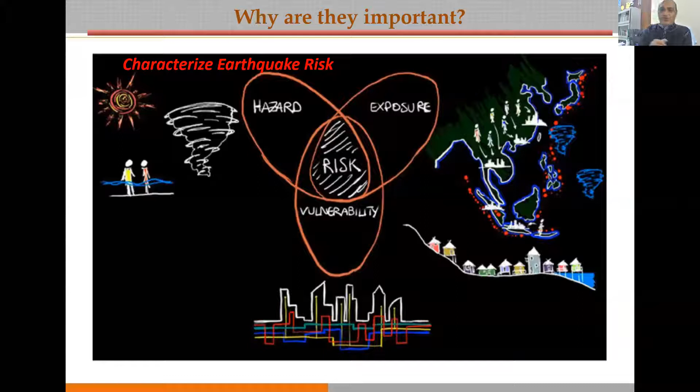Because risk, there's a very typical or peculiar interesting dialogue: risk hai to ishq hai. I don't know whether you understand my Hindi or not, but risk hai to ishq hai. Ishq means love with your profession, love and passion with your profession. So if you develop that, I think we can move ahead in a great spirit.

And whenever we are talking about risk, which is basically a function of hazard, exposure, vulnerability, and location, that again varies from place to place, because our country has now been classified from seismic consideration into 4 seismic zones.

Hazard we cannot stop. Occurrence of an earthquake of sufficient magnitude, which is capable of causing any kind of damage, man-made or natural, is there. So we have to be ready and prepared to face such kind of consequences.

On the contrary, exposure is an important aspect for which engineers as well as the administrative or local bodies are responsible. What exactly does exposure mean? The objects and structures built by man, or engineers in particular, which are exposed to the effect of hazard - that is bridges, buildings, lifeline structures, and so on and so forth. So they should be made more resilient, in compliance at least with the codal provisions which are prevalent in our country.

So hazard we cannot control, but exposure we can control by good engineering, design, planning, execution, maintenance, and practices.

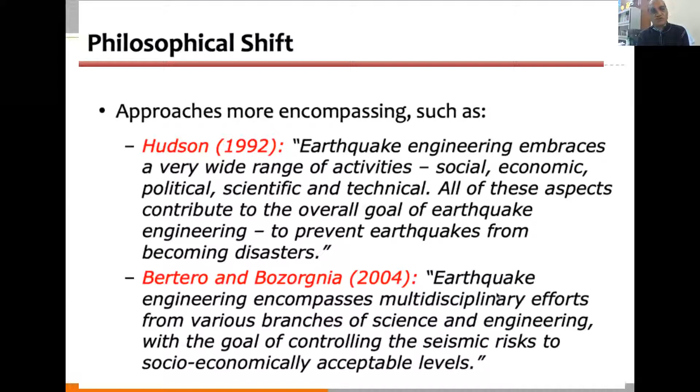So as I mentioned earlier also, the engineer is not only an engineer or technocrat. He has to play or act in different verticals, like a film actor. He has to work, he has to play a role in social, economical, political, scientific, and technical activities. All of these aspects contribute to the overall goal of earthquake engineering: to prevent earthquakes from becoming disasters.

So with this philosophical shift, if we look at our understanding of earthquake engineering, for that purpose we may have to refer mostly to ASCE 41, ATC 41, 2013.

If we talk about building audit of any infrastructure, we have to define the performance objective. What is your expectation? Whether you want your infrastructure to be fully operational immediately after the disaster, that is particularly important in case of hospitals, fire stations, important office buildings, from where the control of post-disaster mitigation is to be done, in addition to school buildings and assembly halls, wherever you are accommodating more than 250 persons at one store.

Whereas we cannot afford to construct all the buildings from cost consideration, keeping in view the high importance factor or high zone factor, for that purpose our code permits the building to go under large deformation to sustain certain cracks or damages in the buildings, and those cracks should be such that they can be repairable at minimal cost, but collapse should not occur.

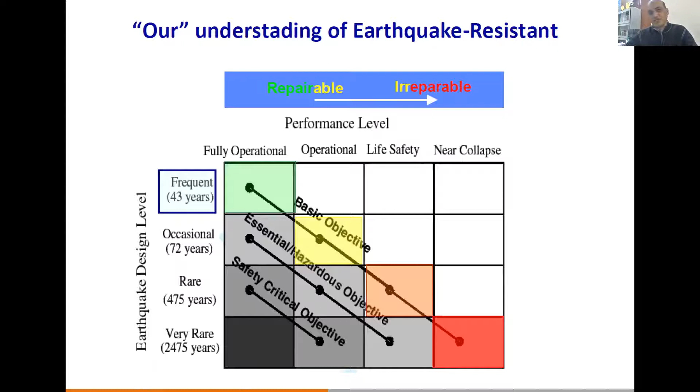Frankly speaking, we are designing our buildings as of now only 10 to 15% of that of the expected earthquake which may occur at a given point in time. With this backup, there is now a great expectation from society, and we have to make, not the entire country seismic resilient at once, but move ahead step by step. For that purpose, we should start this work from our campus, in our town, in our district, then to the state, and then for the country.

To begin with this Herculean task, let us begin with at least the lifeline buildings, that is hospital buildings, school buildings, and educational institutions.

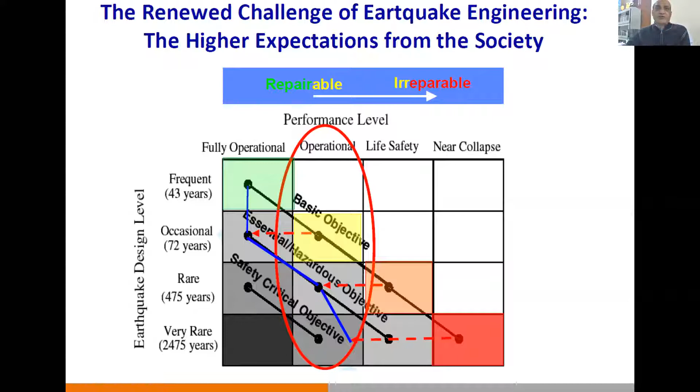So what do we exactly mean by the design performance objectives? Basically, it allows that under a small shaking, only minor cracks are permitted, or no cracks, or non-structural members may damage, but there is no damage to structural or non-structural members. This is possible most of the times in the case of frequent earthquakes which may occur in a span of 43 years, of low magnitude.

In the case of moderate earthquakes, we allow our structural system, basically non-structural members, to go under damage which can be repaired, and slight minor damage to the structural system, particularly to the beams, not to the columns. But in large or great earthquakes, we allow our building to damage the non-structural members as well as a few structural members, but collapse should not occur.

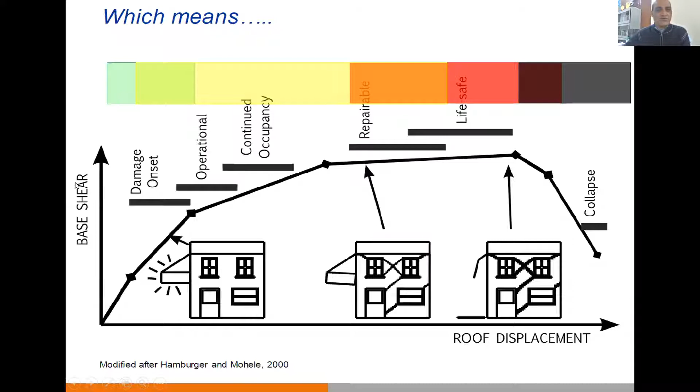So this is what is basically generated in terms of a base shear and roof displacement.

When you talk about the disaster, now we have to talk about disaster risk reduction 2015. There is a framework set by Sendai, called the Sendai framework, which is applicable from 2015 to 2030, which also focuses on strengthening our important lifeline buildings first. And strengthening doesn't include simply structural members, but non-structural members also, and critical facilities.

At the same time, we should inculcate awareness that all new structures should comply with the codal provisions, but at the same time, we should take care about the existing facilities to make them seismic resilient.

During this survey, we should identify the critical facilities which are located at inaccessible regions. For example, a hospital located in a very crowded location - in case a disaster causes collapse of buildings, there may be no access to the hospital. In that case, this kind of facility is of no use.

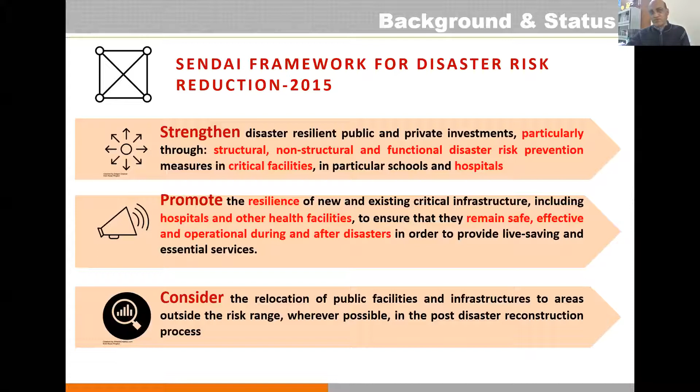Your critical lifeline facility should be located in such a way that it is accessible after disasters. This consideration needs to be kept as a background, and we should look not only from the point of structural damage, but also non-structural damage and non-structural elements. There are a lot of non-structural elements which pose falling hazards and keep occupants in a vulnerable situation.

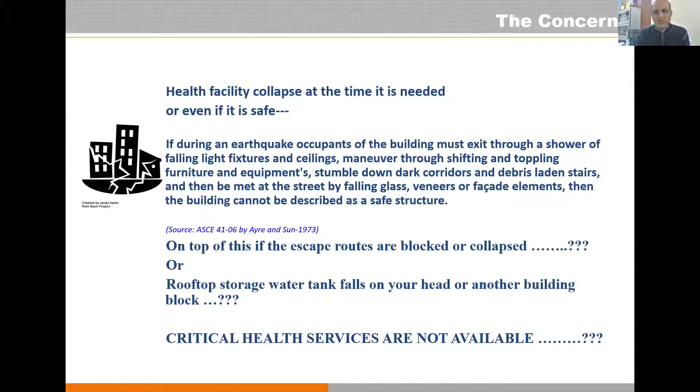Causing most of the time injuries and loss of life also. For example, in case of hospitals, after an earthquake if you get this kind of scenario, then even if your building has enormous seismic resiliency, it is of no use.

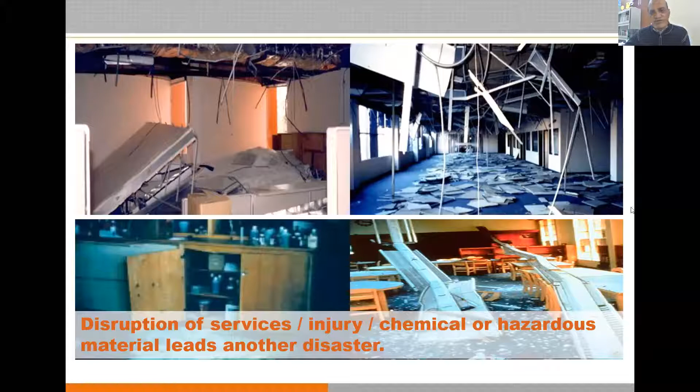That means we have to take care about non-structural members like gas pipelines, false ceilings, cylinders, almirahs and other things - they should be anchored properly, tied properly, along with furniture and other structural and non-structural members.

Such members should be adequately connected, tied, and made robust, so that in case of shaking they should not create a falling hazard. And when you look at the structural system, we have four structural system typologies.

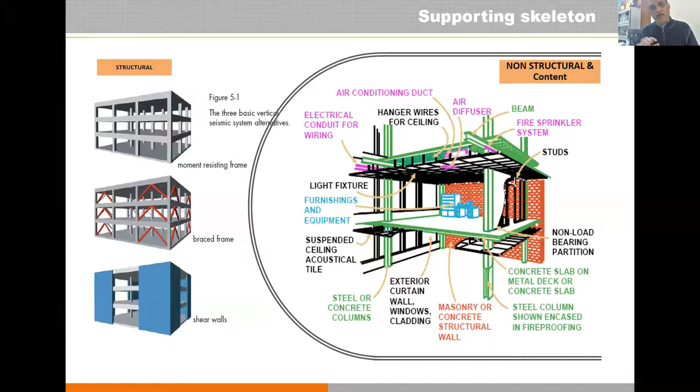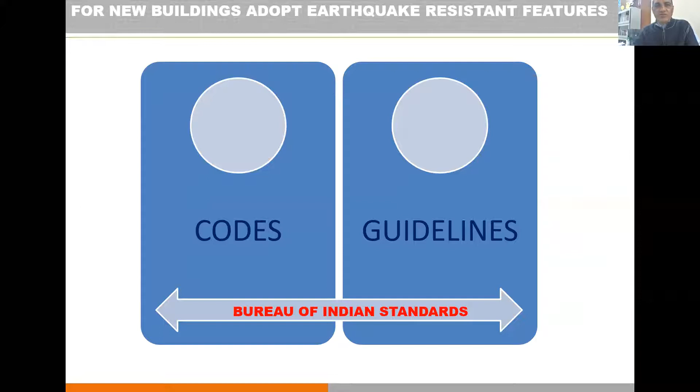That is the RCC moment resisting frame with braces and shear wall, and typically our traditional masonry buildings are always there. When you talk about earthquake resiliency, India is not behind any developed country in terms of knowledge, codal provisions, and guidelines. There is ample codal provisions and guidelines available, and they are being revised from time to time.

The recent one from seismic vulnerability assessment and retrofitting consideration is IS 13935/2009, and for seismic evaluation and strengthening, more pertinent to the topic of the present discussion, is IS 15988, which takes care of how to evaluate the building infrastructure, and if it is found deficient, what are the ways to strengthen or retrofit it.

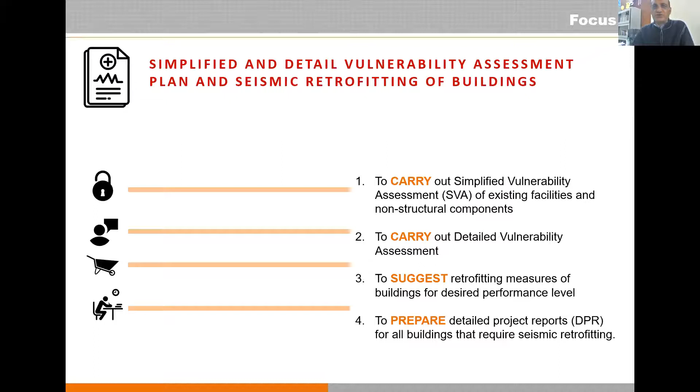So codal provisions are there, and for that purpose we need to start our journey to assess the seismic vulnerability of buildings, structural and non-structural. Whenever you look from the structural consideration, first of all, have a look under which type - this has to be done under four categories.

That is: building typology, history, architectural shape, and design and execution. In the typology, you have to first understand which type of building typology is there, whether it is a load-bearing structure, RCC frame building, steel structure, and what type of foundation and other structural considerations.

Apart from that, history is also important, because aging also kills the building or its intended purpose. So aging, change in use, damage in past, design - at the time of design, what kind of loading you have taken - this needs to be understood from the prevalent building for which you are conducting the structural audit or damage vulnerability assessment.

Definitely, you must by now have understood well about the planning of any building. In terms of plan, it should be symmetrical and not irregular in plan, in both horizontal and vertical directions. Connections should be adequate, and design should have been done adequately.

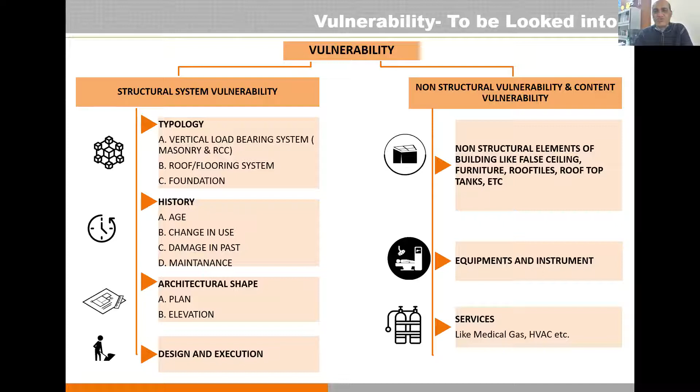These aspects will be addressed under the structural seismic vulnerability category, whereas non-structural systems or non-structural vulnerability and content vulnerability should also be understood - from the point of view of how non-structural elements like false ceilings, furniture, roof tiles, rooftop tanks have been anchored and placed properly, and whether if they have excessive mass, they should not create unnecessary excessive torsion in the building. All these things need to be understood in the non-structural assessment.

So whenever you talk about the vulnerability of a building, that may occur at different stages, different points of time, particularly at the planning and design stage. It might be possible you designed and constructed your building as per the prevalent Indian standards in 1982.

When you assess that same design or building as on date, it may be deficient because there is a continuous increase in seismic provisions, seismic codal demand, and as a result, that building, even if your design at that point was safe or correct, it may not comply with today's provisions.

Apart from that, we make use of software blindly without understanding what is happening at the back end, and that's where we are not able to design our building properly.

I apologize to the youngsters, but at the same time I salute the seniors. In old days we used to do all the designs manually, one by one. Although it was taking a lot of time, it was giving us confidence that whatever I did is correct. But when we are using software, it is not happening.

So make it a habit: whenever you are designing any structure, try to check or cross-check with manual hand calculations as well, because a small 1% or 5% error may lead to a 50% error in actual performance. So this is very important.

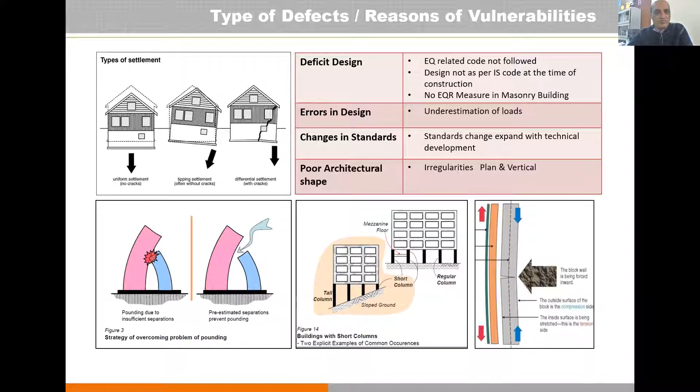So that is the problem. Please give adequate separation gap between two buildings, and how to calculate those gaps has been clearly spelled out in our codes.

I'm just taking a one minute pause to interact with you all. Am I going too fast or too slow, or is there something I need to correct myself? Please give me your input. No, sir, pace is okay.

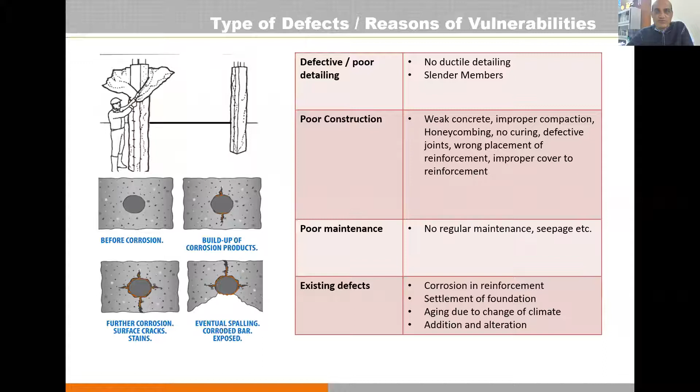Thank you. Another reason for vulnerability is execution. During execution, we may have defective construction procedures or poor detailing, poor construction practices, maintenance, and existing defects, particularly corrosion and other things, which create trouble for the service life of the building. This is very important from construction, execution, and maintenance consideration.

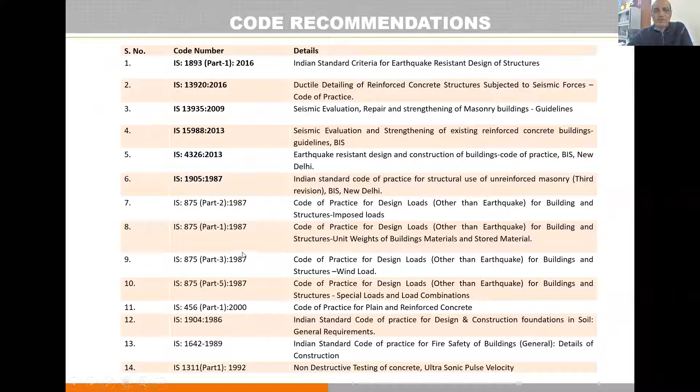So there is a wide range of codes available, and one can refer to these codes during design, execution, or at the time of building audit.

Apart from that, our codes have not been upgraded so far for critical or lifeline buildings. For that purpose, NDMA guidelines may be referred to, for hospital buildings and for retrofitting of buildings. This is very important.

These are references one has to make while conducting a building audit. Apart from that, the international code ASCE 41-2013 is also very important when conducting performance-based analysis of existing buildings. Particularly, we conduct linear static analysis for masonry buildings, and non-linear time history analysis in particular for RCC or steel structures.

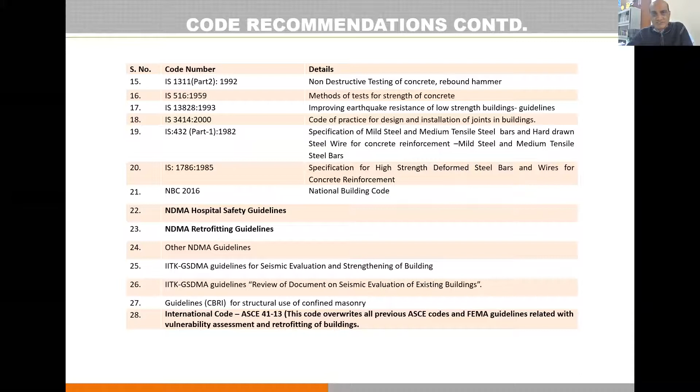These are the codal recommendations and guidelines emerging from NDMA with respect to lifeline buildings, particularly hospital buildings, which clearly spell out the performance objectives of such buildings and other critical units.

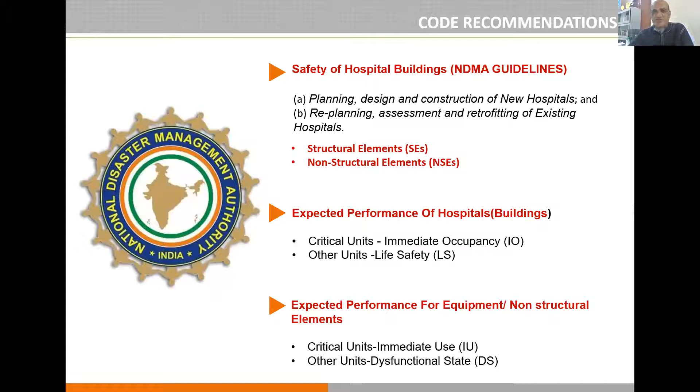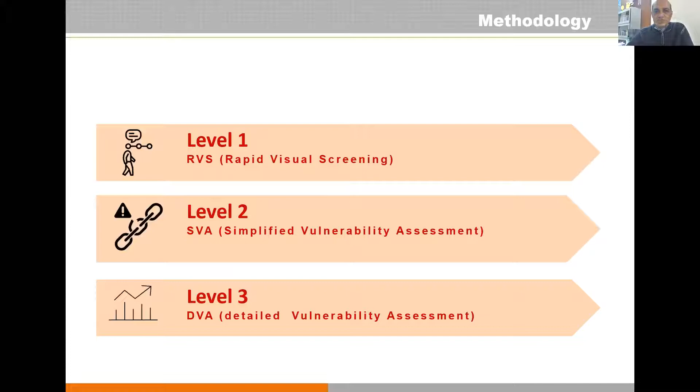When you talk about building vulnerability methodology, generally the building vulnerability assessment is categorized into 3 levels: rapid visual screening, simplified vulnerability assessment, and detailed vulnerability assessment. Rapid visual screening is normally done when you have a large number of building stocks.

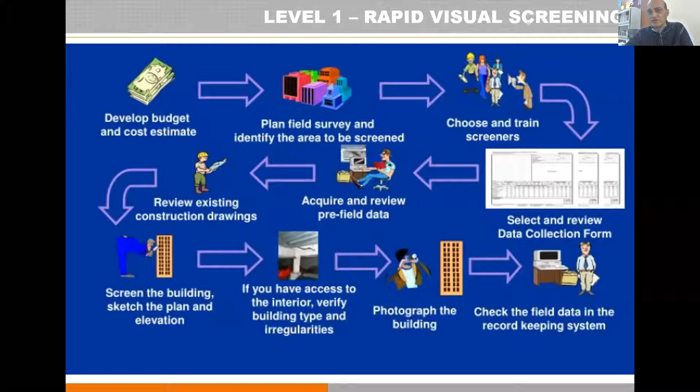The name itself suggests it is a rapid process, done basically on a visual basis, and it is very qualitative. It doesn't ensure or clearly define whether your building is safe or unsafe. It will just qualitatively indicate whether your building is unsafe or safe, and whether you have to go ahead for further detailed investigations or not. So I will not go much into detail, it's a very simple process.

Now coming down to the simplified vulnerability assessment. This is a very important aspect. Whenever you have been given a task to conduct the building audit or building vulnerability assessment of any building, you have to follow certain steps, irrespective of the building typology.

First of all, condition assessment and visual survey of the existing building is very important. Based on that, you have to collect the structural and architectural drawings of the existing building. In 99% of cases, you will not find those things, so don't get afraid, it is a common story everywhere. So your responsibility increases, and you need to prepare your own drawings, as-built drawings, for both architectural and structural.

For the structural aspects, apart from the geometry, you need to find out how the detailing of the reinforcement has been done, what is the condition of the reinforcement, and what is the size and spacing of the reinforcement. That you can do by conducting rebar locator tests, so you have to recreate the structural drawings.

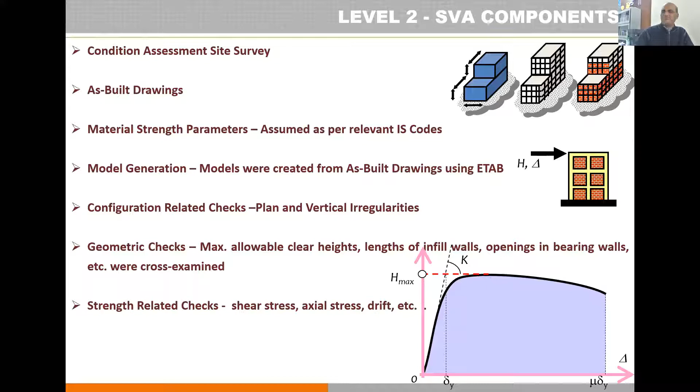Table 5 and 6 describe configuration-related checks on plan and vertical irregularity, geometrical checks in terms of maximum allowable clear heights, drift, deformability, lateral strength, stiffness, mass distribution, and also strength-related checks related to shear, axial force, and drift. All these checks in compliance with table 5 and table 6 of IS 1893-2016 one has to conduct, whether it is a masonry building, load bearing building, or RCC frame building.

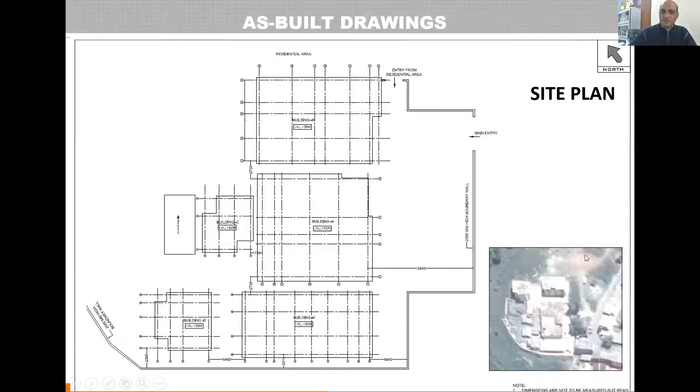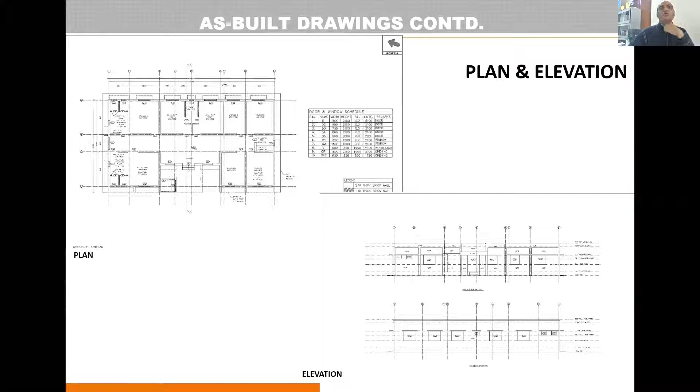This is an example of how you have to create and recreate the drawings. First, you need to create the site plan, take the help of Google, locate your building, because whatever report you generate during your building audit will be referred to by someone, and nobody should put a question in front of you. So to address this, you give proper references, take a Google map, put the location of the building, locate your site, and draw different plans and elevations with all detailing, the way you would for new buildings. In fact, sectional elevations and connection details are also very important.

In addition to that, you have to display or connect the visual photographs which you have collected, to give more clarity for the different detailing which has been done. This is one attempt we have done, so I'm sharing it with you.

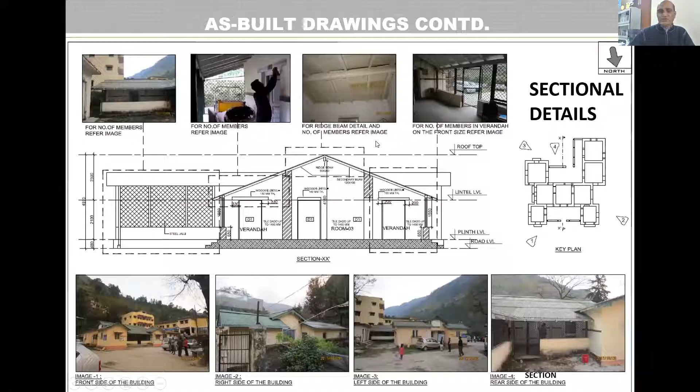Apart from that, before conducting the detailed non-destructive assessment, during the visual assessment you should carry out extensive distress mapping. That is, assess each and every element, find out what kind of distress is there, whether it is suffering certain cracks, what is the width and length of the crack, what is the size and shape of the crack, categorize it in a proper tabular format, and define the reasons thereof, if possible.

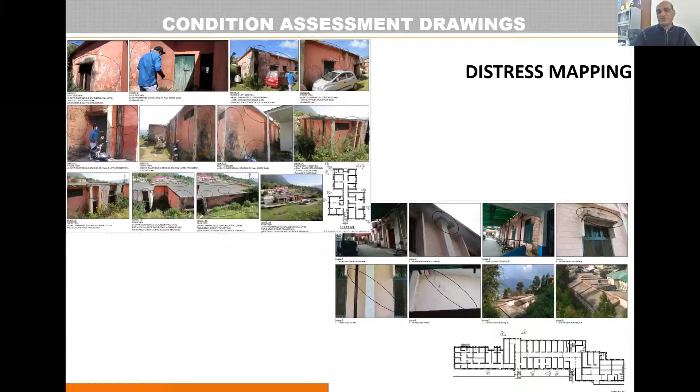So that is how the distresses which have occurred in the building are documented properly with observations and pictures, and can be taken care of while executing your numerical analysis.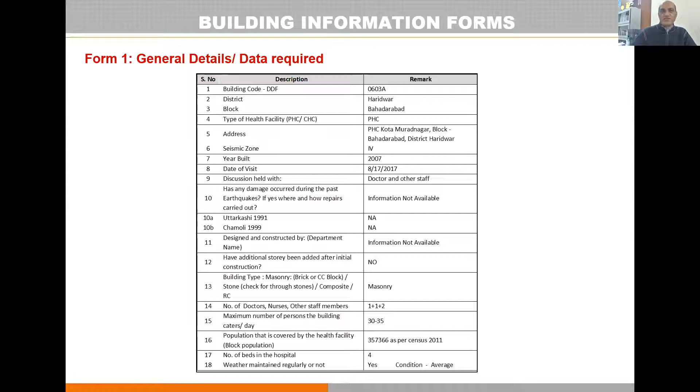Generally, this is the format which has to be adopted for collection of data, including general details, architectural data, structural and non-structural data, equipment data, and so forth. After collecting the basic information about geometry and material property, one has to move on to the office and carry out the numerical analysis or numerical modeling of the existing building.

Normally, one has to carry out 3D modeling nowadays, using ETABS, STAAD, or any software you have mastery in for conducting such analysis. While conducting the analysis, masonry walls should be modeled as shell elements, 2D elements, whereas the material properties can be obtained from the non-destructive test.

In case of masonry, it is very important how you pick the material property. The generally conducted non-destructive test defines the material property only for concrete, but in case of load bearing structures where masonry is involved, in situ material strength is very important, and for that purpose you have to conduct the flat jack test to know the in situ material strength.

If you do not have access to the flat jack apparatus or equipment, alternatively one can take certain specimen samples of the bricks and mortar, assess its in situ compressive strength, and based on the in situ compressive strength of the bricks and mortar, you can refer to IS 1905.

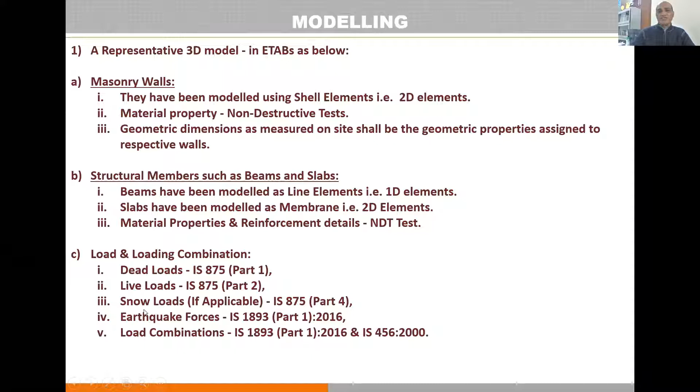Definitely the loads, after doing the material and geometrical property input parameters—dead load, live loads, earthquake loads and other combinations thereof—can be taken as per the provisions given in different codes as listed in item 6C here. This is an example in which we have conducted modeling of a load bearing structure.

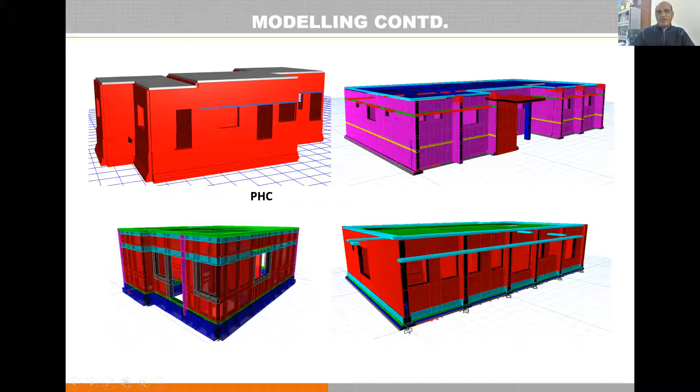First of all, by adopting the procedure as I have explained just now. And after conducting this modeling, parallelly we can conduct the configuration related checks as per table 5.

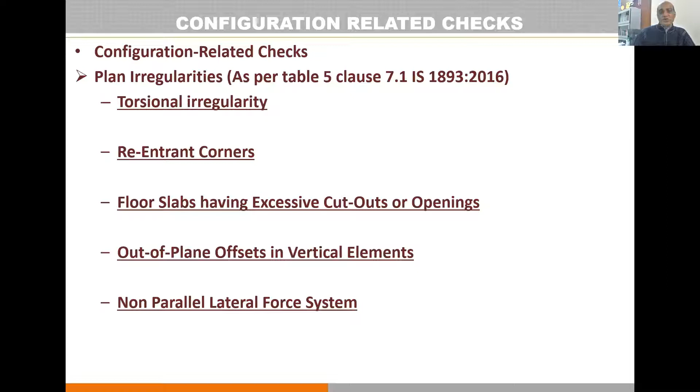These checks are in terms of torsion, re-entrant corner, floor slab cutouts, out of plane offsets in vertical elements, non-structural elements, and non-parallel lateral forces.

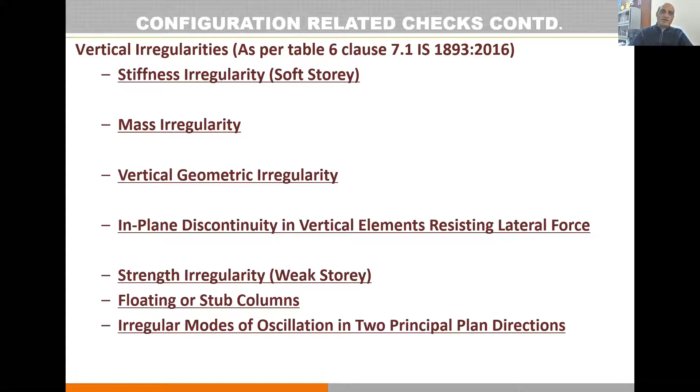As regards understanding the vertical irregularity, table 6 of clause 7.1 of IS 1893:2016 can be referred, which clearly defines stiffness, mass, vertical geometry, in-plane discontinuity, strength irregularity, floating or stub column treatment, and irregular modes of oscillation. All these provisions given in table 6 are to be adopted and checked for the model you are performing.

Particularly for RCC frame structures, the geometrical related checks in terms of column width, beam width, aspect ratio, and partition all need to be adopted or taken care of as per the detailing given in IS 13920:2016.

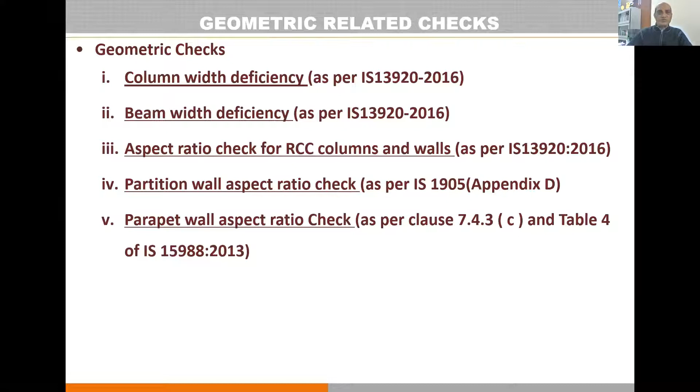After conducting such checks for masonry buildings, particularly the shear stress checks for unreinforced masonry shear walls, IS 15988 has to be used. The permissible values of stresses for masonry buildings can be obtained or derived from IS 1905. For axial stress deficiency and approximate column shear stress, IS 15988 can be referred.

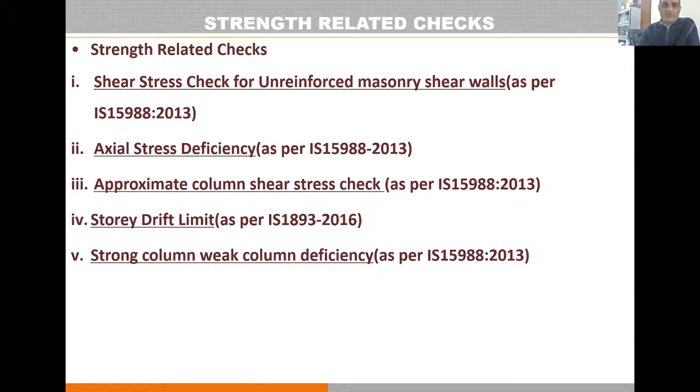Story drift limitations at 0.004 story height can be taken from IS 1893, and the strong column weak beam phenomena can be checked, along with different retrofit strategies, which can be referred from IS 15988.

Once you have conducted the seismic vulnerability assessment, you will come to the conclusion whether your building is safe or not. How will you know? You have to check the entire building at a global level as well as at the local, element level, to see whether any member is deficient or not, and whether the entire building meets the provisions made in the code. If not, identify the deficient members and try to strengthen such elements. After identification of such deficient elements, you can plan what appropriate retrofit strategy is to be adopted to make that unsafe or deficient member safe.

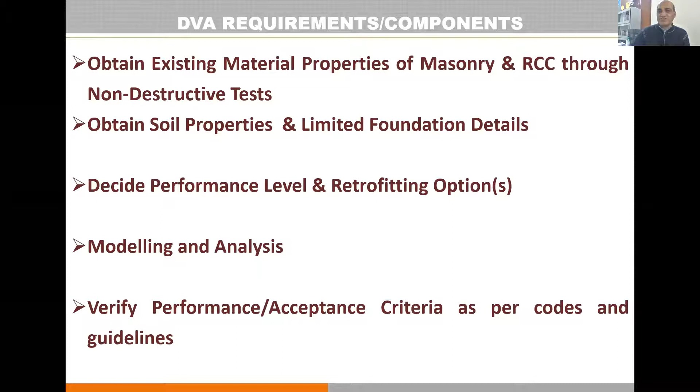Then decide the performance levels and retrofit options based on the functional and intended purpose of the building. Carry out the modeling and analysis, and perform the different checks and acceptance criteria as per the code and guidelines. The procedure is the same as mentioned earlier; only the in-situ and soil investigation needs to be taken care of. While dealing with masonry buildings, one has to take the help of IS 4326/2013 as well as IS 1905 for assessing different seismic resilient provisions and measures, both in horizontal and vertical perspective, and IS 1905 for permissible stresses of masonry.

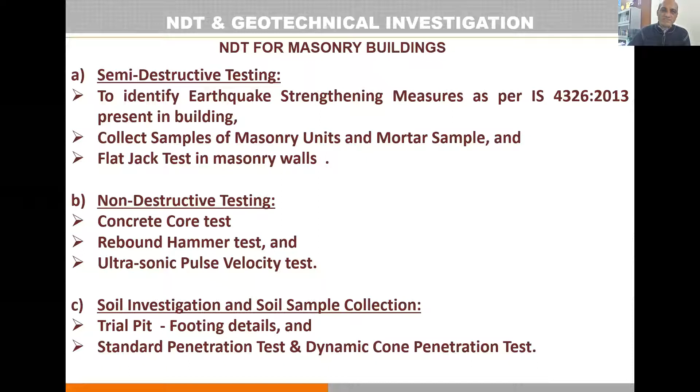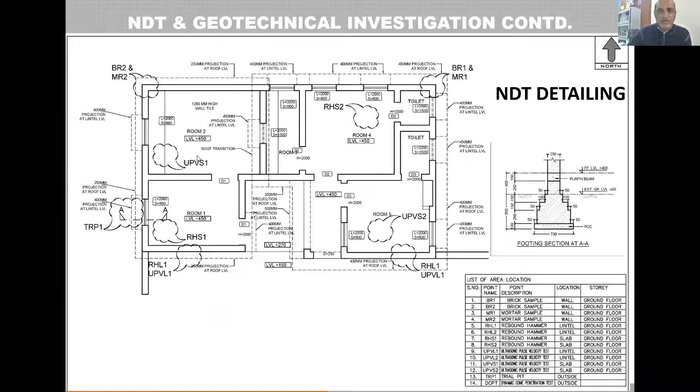So this is one of the examples I'm showing. Wherever you are taking samples while conducting the investigation, please mark it appropriately and correctly on the drawings, because if someone wants to verify or cross-verify later, it will be a very useful document that you generate.

Again, I was simply saying foundation verifications, foundation checks, and so on, but the way I mentioned it simplistically, it is actually very difficult to conduct at site. Foundation strengthening is again a very Herculean task compared with the superstructure, and getting information on the foundation is again very, very difficult.

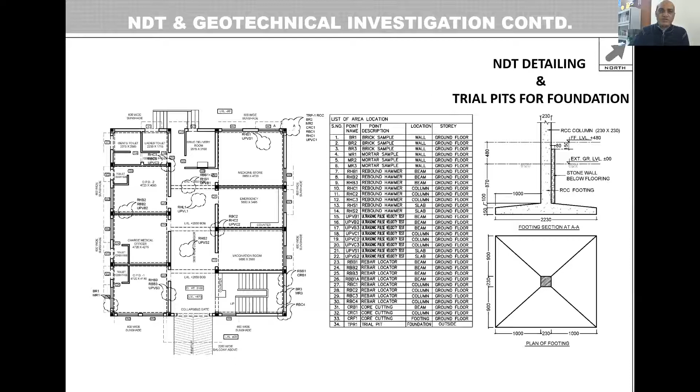So for that purpose, one has to randomly take a call on site based on site observations, carry out certain trial pits, and expose the foundation to find out its size and shape. If required, carry out removal of the concrete, chip it out, and find out how the reinforcement detailing has been done in the foundation. Alternatively, you can use a rebar locator to assess the size, shape, and reinforcement detailing.

This slide shows the detailed investigation one has to take for masonry buildings. This is the test setup for the flat jack, which gives you the in-situ compressive strength of the masonry. Alternatively, if you don't have a flat jack, that's not an issue—you can take certain samples of bricks and mortar separately and find out their in-situ compressive strength and other properties.

These properties can be incorporated into the formulations given in IS 1893/2016, and thereby you can calculate the modulus of elasticity of the masonry as well as the masonry strength.

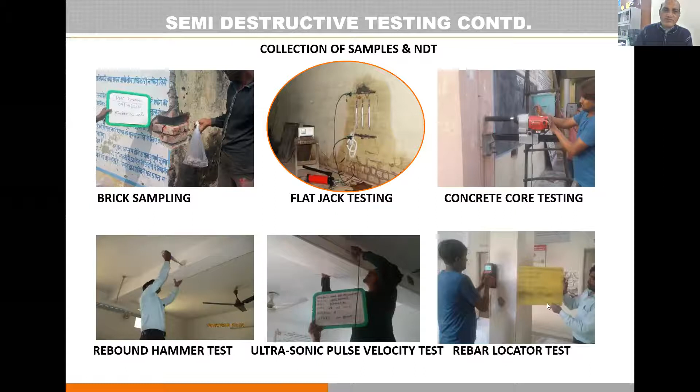Other pictures show the concrete tests which have been done, including core cutting, UPV, ultrasound, rebar locators, rebound hammer, and so on.

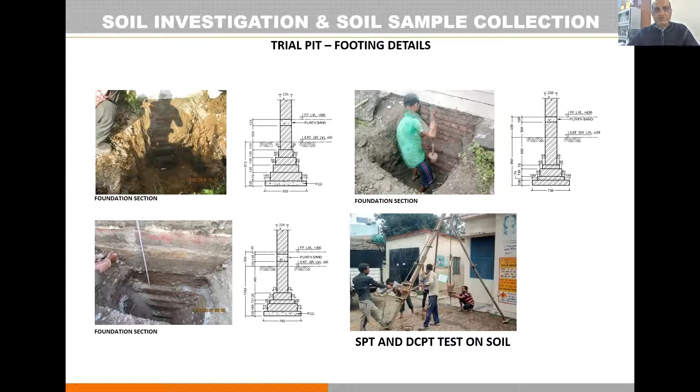This is an example of how a trial pit has to be made at the site, and this is another example which shows that in case of any difficulty, please conduct detailed soil investigation at the site. After doing this exercise, draw the pictures and figures showing the detailing of your observations about what has been implemented at site.

Upon doing so, you have now identified the deficient members which exist in your building, and now it is time to think of retrofitting. For the retrofitting purpose, one has to find out alternative ways and means.

There are a plethora of techniques available for retrofitting masonry—widely used steel plate jacketing, or welded wire mesh, or FRP wrapping—or sometimes providing additional reinforcement embedded within simple cement mortar plaster or shotcrete, which is a widely adopted technique for strengthening masonry buildings.

I am sure that in the subsequent lectures this will be taken up in detail. I am not going into much detail about the strengthening aspect at this point in time. As regards other techniques which are widely used, that is fiber reinforced plastics.

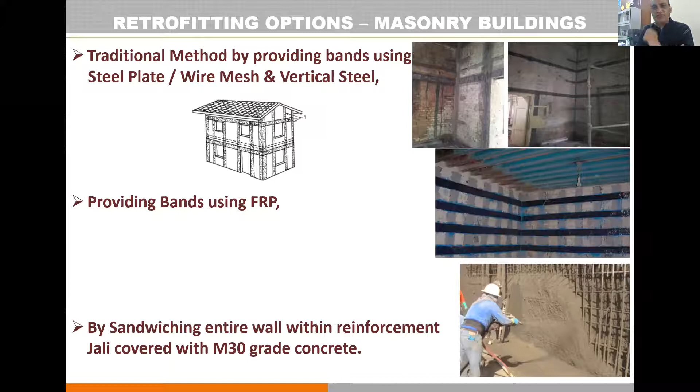While doing retrofit, preparation of the surface is very important. Whenever you are implementing expensive additives, that doesn't make your structure safe, but the way you make the composition of those additives and the way you apply them is more important. So simple investment is not important, but the procedure and implementation is also very important. You have to be very particular on that.

These are some of the techniques which are normally dealt with for masonry buildings: sandwiching with hard drawn wire mesh or stainless steel mesh, and sometimes lightweight FRP or GFRP. Complete fabricated textile sheets are applied, if not laminates.

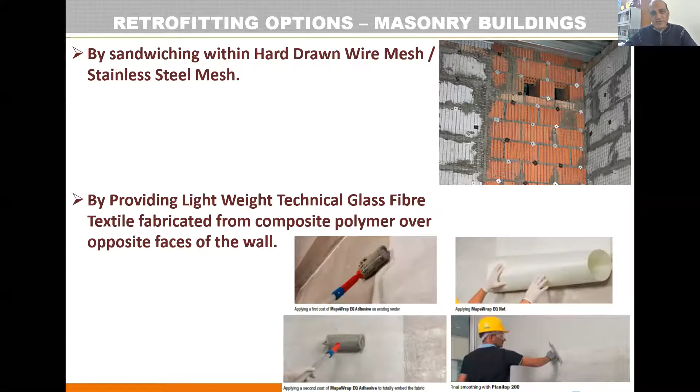But when you see these different techniques, most of the time in RCC buildings, 50% of retrofitting work now is being done using FRP wrapping. But please be careful whenever you are conducting any FRP wrapping. It should be done after detailed diligence, detailed engineering, calculation, and computation, and it should not be done simply on a prescriptive basis.

A subsequent speaker will definitely highlight more detail, but my job is to tell you that after selection of appropriate retrofit technology, simply recommendations in text form will not serve the purpose. The engineer will understand only the drawings. Whatever recommendations you make, prepare a clear-cut, detailed engineering drawing with all specifications and methodologies given therein, and the locations where you need to retrofit.

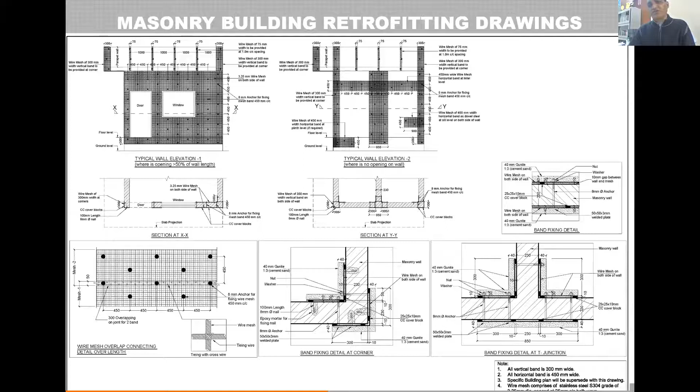Then you need to strengthen the foundation. Foundation strengthening means most of the times you have to enlarge the foundation size. In that case, the widely used approach is either to drill the hole in the masonry and then clean the surface, provide additional reinforcement, grout in that particular thing, and protrude the additional reinforcement which was embedded outside.

And carry out the additional masonry work. If it is a masonry strip footing, if it is a RCC footing, then you can carry, or sometimes even if it is a masonry building, you can provide a RCC beam kind of element having a width equivalent to the size by which you want to increase the size of footing.

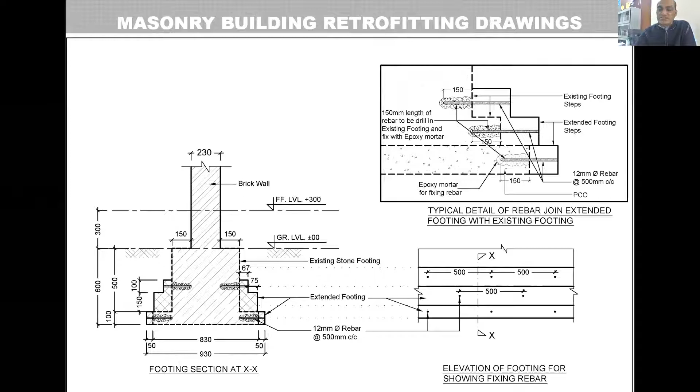So addition of masonry or concrete can be made to the existing footing, but be careful the adequate connection tying of new masonry or RCC with the existing masonry by making use of shear connectors need to be ensured adequately, the way it has been detailed in this particular slide.

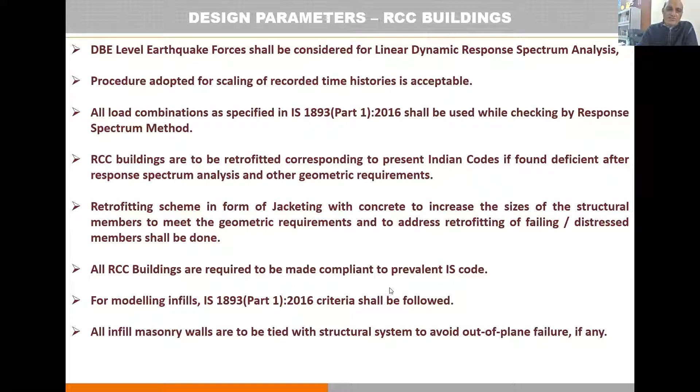As I mentioned earlier, the design parameters for the RCC building, I have spelled out everything earlier, that the nonlinear dynamic analysis, you need to have 3 time histories, then carry out the checks for the response spectra, then carry out the jacketing, then analysis and reanalysis, and carry out the checks as table 5 and 6 given in this. So this is how one can create the model in ETABS or STAAD or any other software in which you are comfortable.

While doing the retrofitting of the RCC building, as I mentioned, 50% of existing retrofitting works which is happening in our country or worldwide is using FRP jacket, and the other 50% is by RC jacketing, section enlargement, or steel plate jacketing.

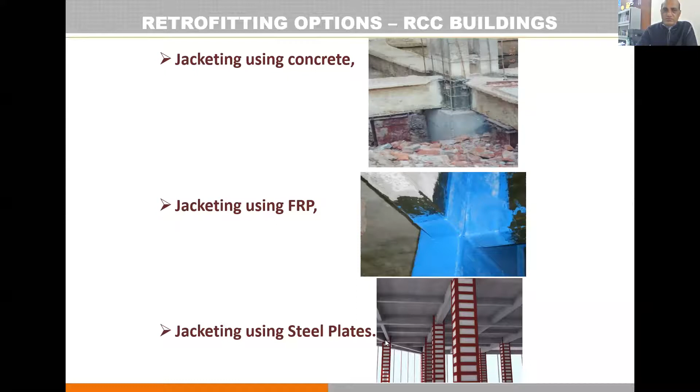So after conducting the modeling, after concluding that yes, I want to go for either FRP or a section enlargement or this, for that the design procedure is given in 15988. That will be defined based on the deficiency you have.

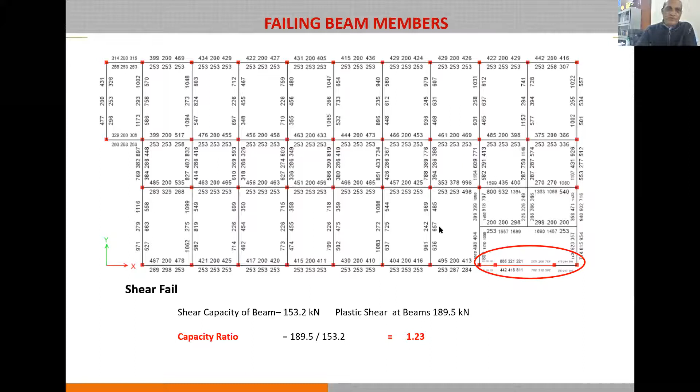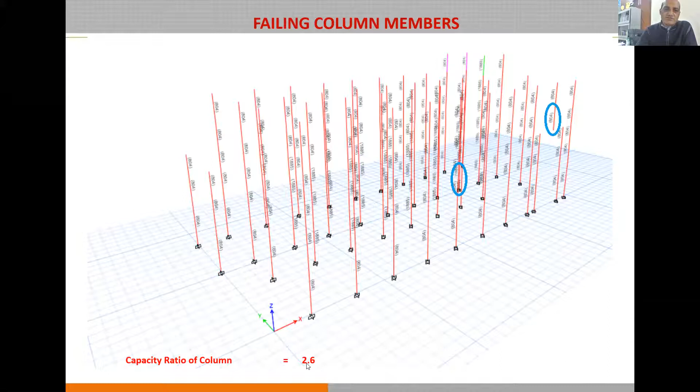That has to be calculated based on the demand and capacity of each member. So this has to be calculated member by member, the way it is shown in this particular slide. And that again has to be calculated for shear, flexure, bending moments, and all. So after identification of the deficient members, wherever the DCR is more than 1, do the retrofit, incorporate in the model, redo the analysis, and repeat the process till your building is categorized as a safe category.

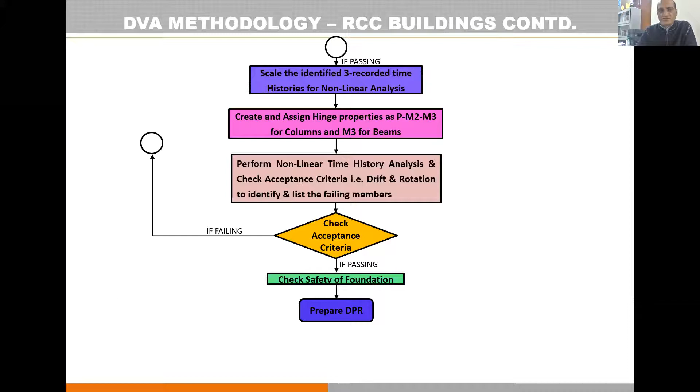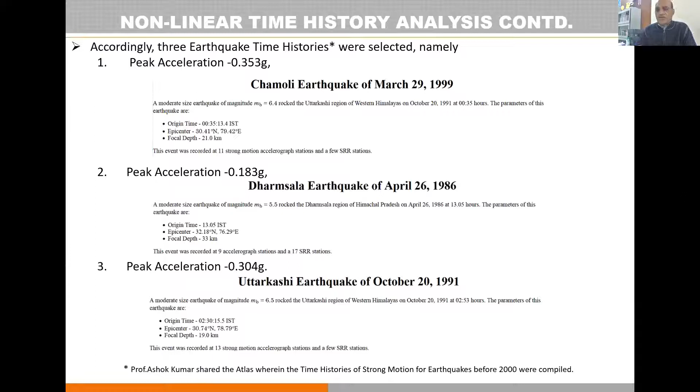As I mentioned, normally we adopt these peculiar 3 time histories: Chamoli, Dharamshala, or Uttarkashi. Sometimes we can take advantage of Nepal earthquake also, 2016 or 2015, because these earthquakes have occurred from Indian perspective of similar acceleration, time window, frequency window, as well as the geotechnical parameters are also more or less same. Or otherwise, if you are not comfortable with that, then you can rely upon the synthetic time histories also.

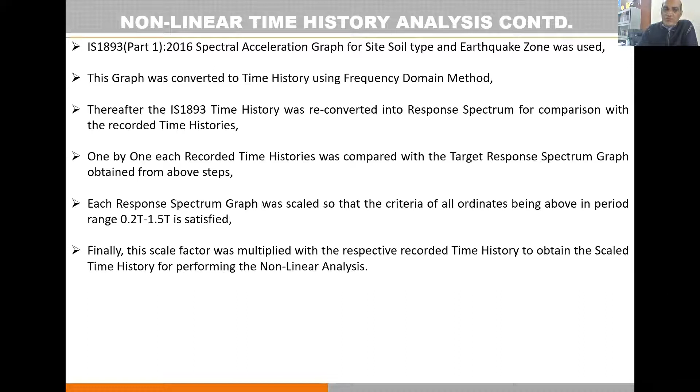So for that purpose, one has to generate this thing, and while carrying out the response spectra time history analysis, each response spectrum graph has to be scaled so that the critical criteria of all the ordinates from above period, that is from 0.2T to 1.5T, is satisfied, and based on that you have to select the appropriate scale factor and incorporate it in our drawing. So this is how we have to scale up the response spectra by making use of different approaches, that is, SRSS is the method which is widely being used for this kind of study.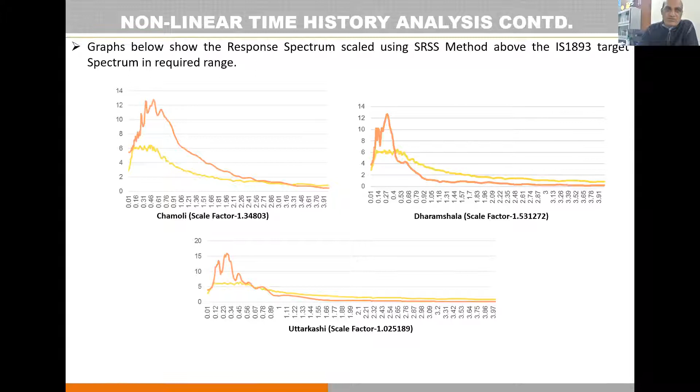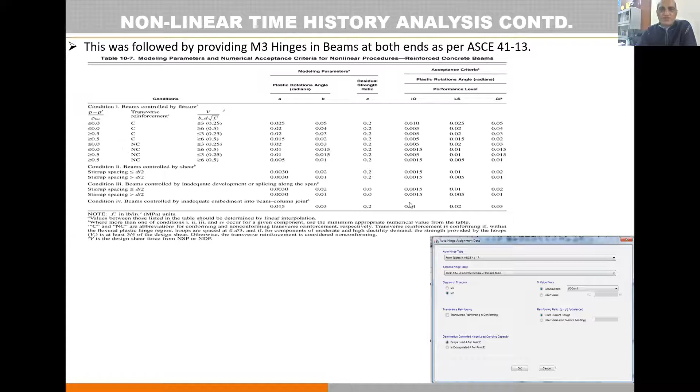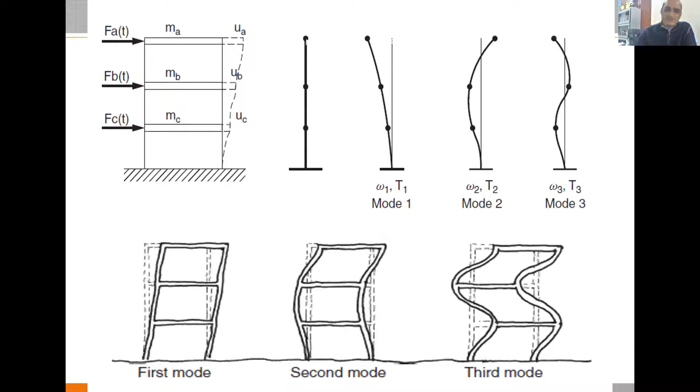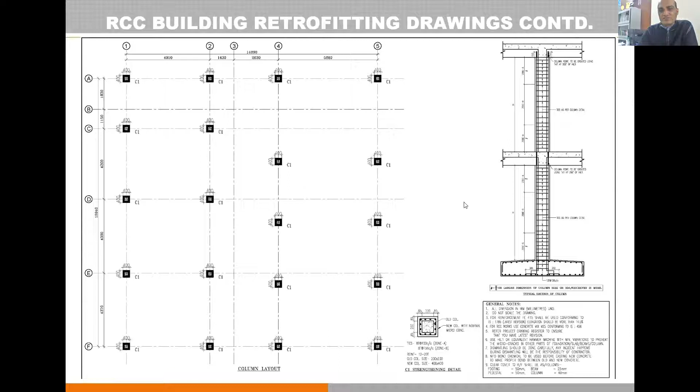After conducting this test, similar to the masonry, we have to do the detailed engineering on drawings also, transfer your observations, recommendations into the drawing format, and this is some of the details in which we are suggesting or recommending the RC jacketing with additional reinforcement again, and how to execute it. That has to be spelled out very clearly in the drawings.

So there could not be a single unified procedure for strengthening, retrofitting, or treating any building to make it disaster resilient, but one has to use his own expertise based on the available data. Because I once again would like to mention that retrofitting is not simple engineering, the way you can design a new structure. It is an entirely different phenomena, different ball game. It totally depends on whatever inputs you are getting from the in-situ building. So the challenge is reverse, and one has to address it after sufficient experience.

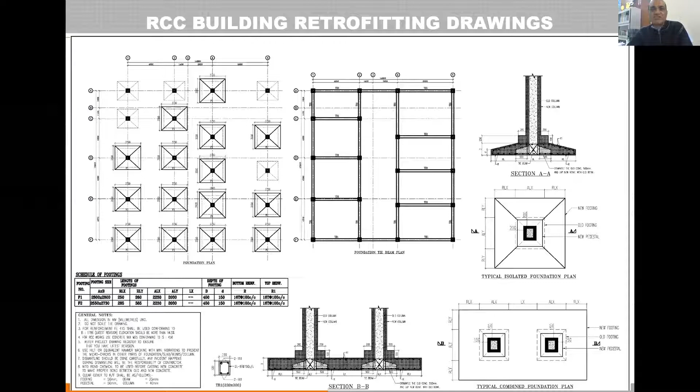So for becoming a retrofit engineer, one needs to have passion first and good experience, and then only after one has to work under some expert for a few days to understand the insights about retrofitting, before directly jumping into the field.

After attending to the aspects related to the structural members, one has to be very particular about the non-structural members also. For that purpose, NDMA guidelines may be referred to.

That section 5.5 clearly defines the acceleration intensity for the non-structural members. So you cannot use the formula given in 1893; it has to be modified differently, given as FP equals Z into 1 plus X by H bracket complete, AP upon RP, IP and WP. All the variables have the same notation: seismic zone factor, importance factor, response reduction factor.

Weight and all those things. Basically FP is for assessing the forces from the acceleration sensitive point of view. So whenever you have a non-structural element related with mass, you have to conduct the acceleration sensitivity analysis for that non-structural element.

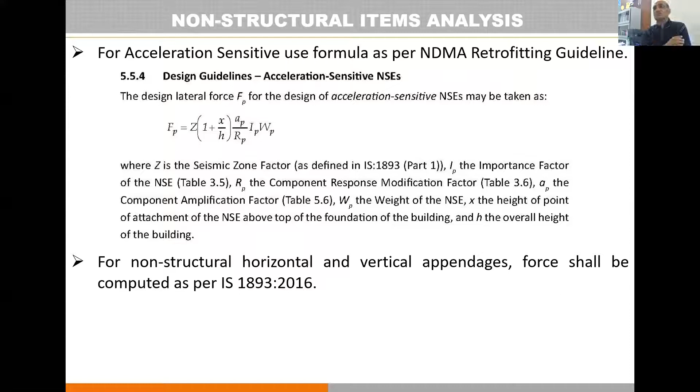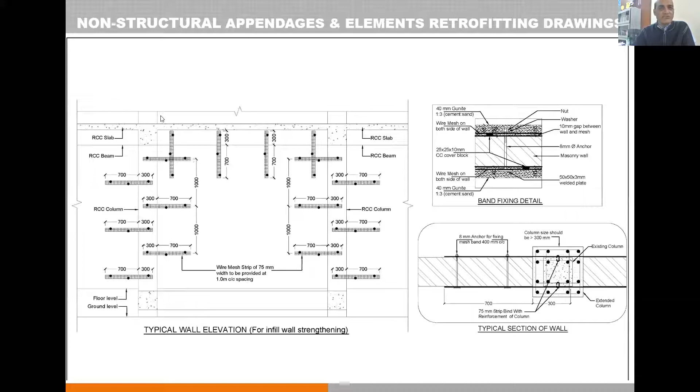But whenever the light material which are hanging, like appendages, false ceilings, you have to carry out the non-structural analysis from the displacement criteria or displacement sensitivity consideration. Even your infill walls have been categorized as non-structural walls, and for that purpose, adequate connections between the non-structural walls to the structural members need to be ensured, the way it has been detailed in this particular drawing.

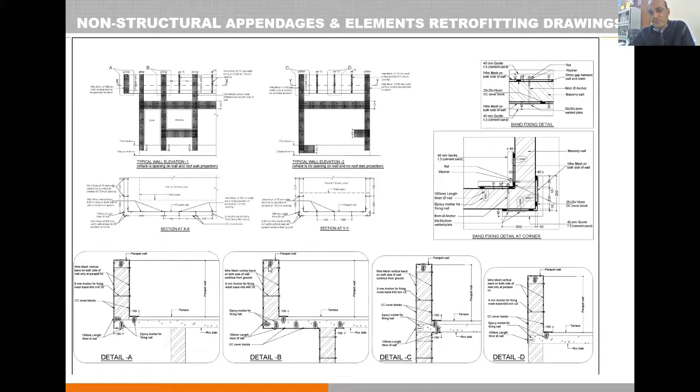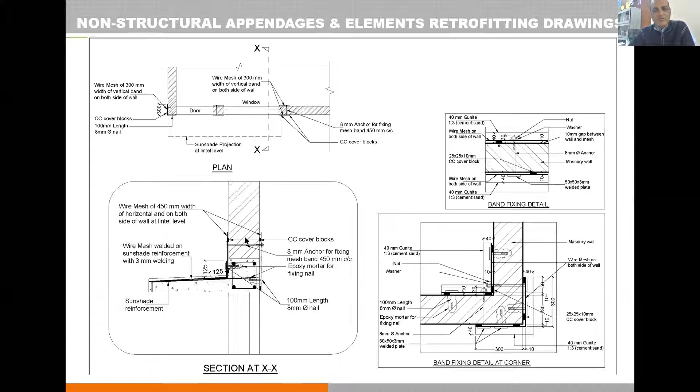So first of all, you should not promote any construction on the cantilever. If at all it is there, it should be anchored properly to the main structural element. Even your chhajja projection and other parapet walls should be made with adequate connections, connected properly to the structural member, the way it is shown in this figure in the slides.

Most of the times, water tanks are placed on the walls or on the buildings. Big hoardings are laid as per convenience, but it has to be ensured that they are connected to the structural members adequately. So the design procedure is again given in the NDMA guidelines. After designing, you have to calculate the pedestal sizes, how it has to be connected, and that will again depend upon the height of the building and capacity of the water tank.

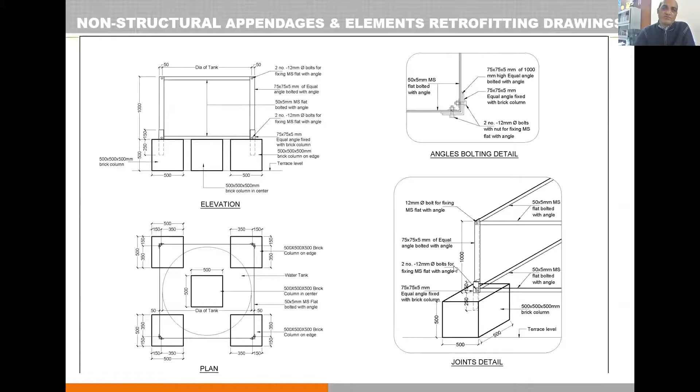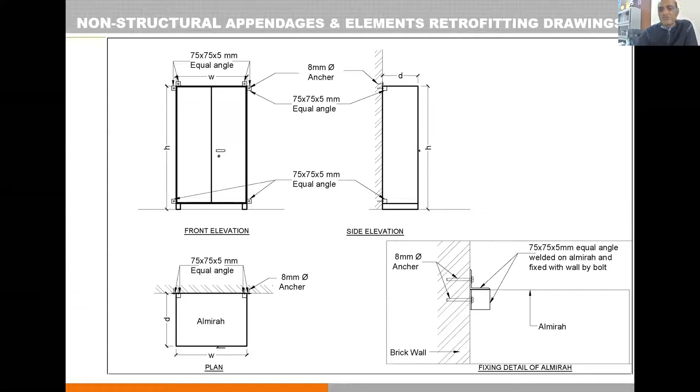So normally these almirahs are to be connected as detailed in this particular picture, properly to the structural members. If it is a load bearing structure, to the wall. If it is an RCC frame building, then it is either to the beams or the adjoining columns.

So in the end, I can conclude by saying that enormous efforts and emphasis have been given so far, in the past three to four decades, on automation, quality, and innovation. We have succeeded to a large extent, but not fully. And now it is time to integrate all these parameters - automation, quality, innovation - along with safety, for new construction as well as for existing infrastructure. For that purpose, we need to take interest in our research, invest in our research, and find new understanding.

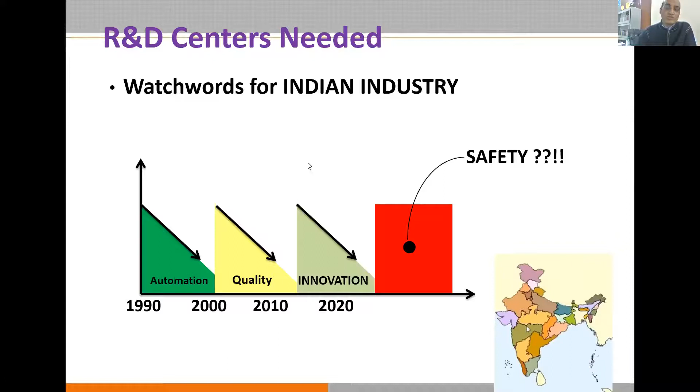Find out the new economical solution, and based on that, as a faculty, we need to increase not only the simple intelligent boy scoring 95% or 98%. Nowadays everybody is getting 98 and 99 percentages also. But one has to see that the technical competency of the engineer has been achieved properly when he passes out from the institutions and goes to the field. The competency is not a simple word.

It basically integrates attitude, skills, and knowledge. He should have a good attitude towards his work. He should attain good knowledge, definitely imparted from the faculty like you, and the skills he should develop. After integrating this, he will develop the passion, and then only the real engineering he will put in place on the site, from institution level, laboratory level to the land. And with this, I will say that you cannot take a chance with the entire world or entire country.

Let us begin from your home, from your institution, from your town, district, state, and for the country. So for that purpose, there is a need for leveraging each other's strength and ancient history, know-how, common passion.